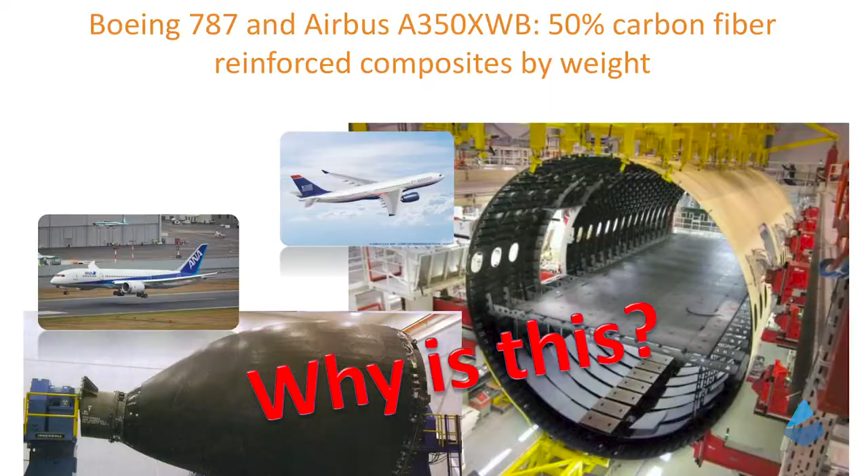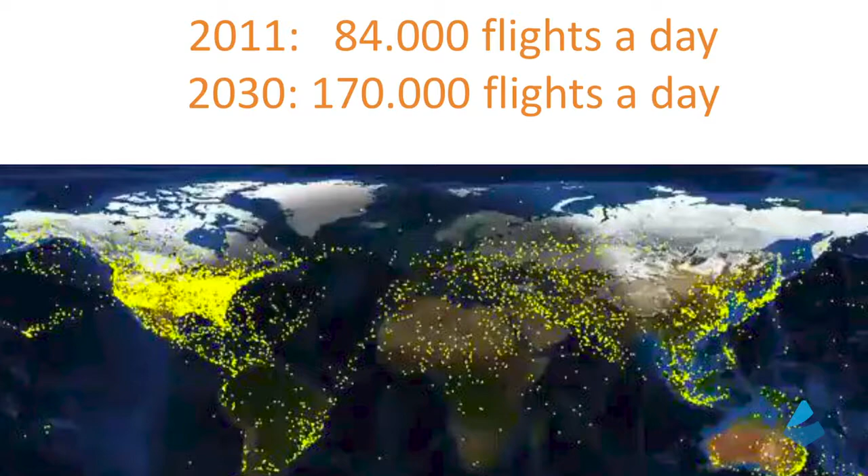And looking at composites, we see the 787, A350XWB, 50% composites by weight on the structure. The nose and the fuselage, the wings, the tails, they're all black these days. And why is this? Air traffic is increasing all the time. The projections today are still, in the next 20 years, travel will double, unless, of course, we are slowed down by the climate change situation.

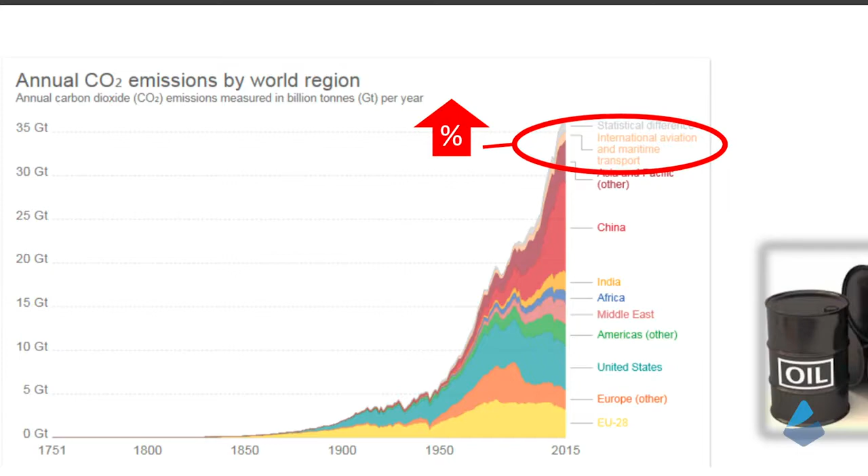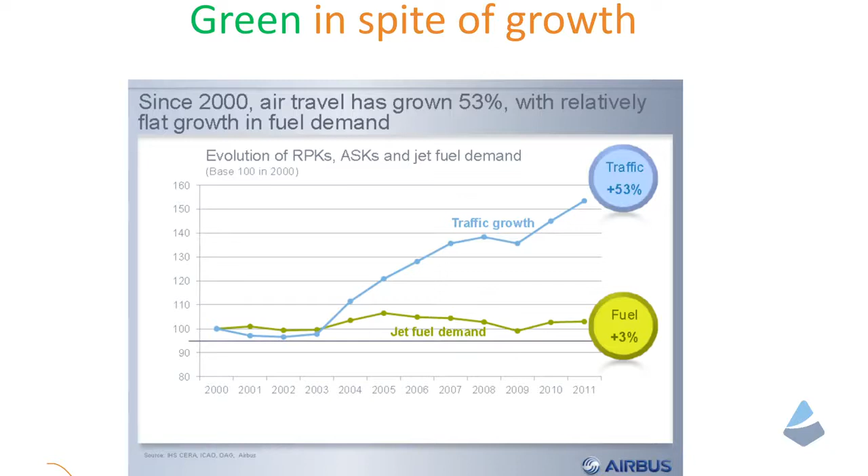This graph, it's a bit difficult to read, but at the top there is a contribution of aerospace, which is just a few percent to the CO2 emissions, but it is becoming bigger percentage-wise. And this is a graph of some years ago of Airbus showing that even though the amount of miles being flown by people is increasing all the time, the jet fuel demand, that's the green line, is more or less horizontal. It's constant. And there's a reason for this, and the reason is the engines. The engines are becoming ever more efficient and larger.

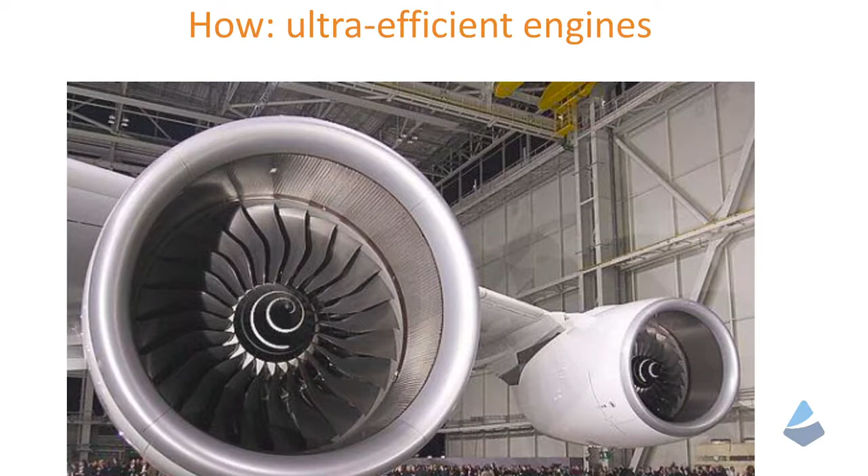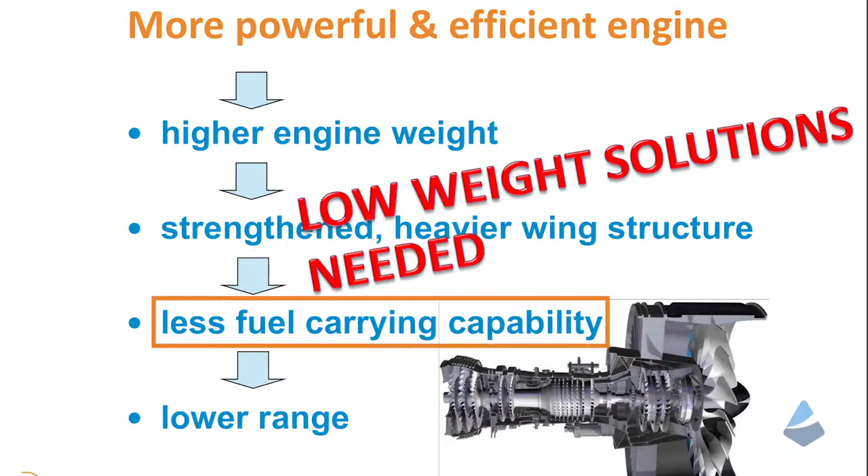And here's the engines for the Neo, for example. So very, very efficient engines. And what does this mean? If you have these efficient engines, the weight of the engine will tend to increase. Also, the wing will have to be reinforced to compensate for this. You'll be able to carry less fuel, and you'll reduce the range of your aircraft. So even though the engines are the big increase in performance, there is a drawback, and we need to compensate. And one of the ways to compensate is to reduce the weight of the rest of the aircraft.

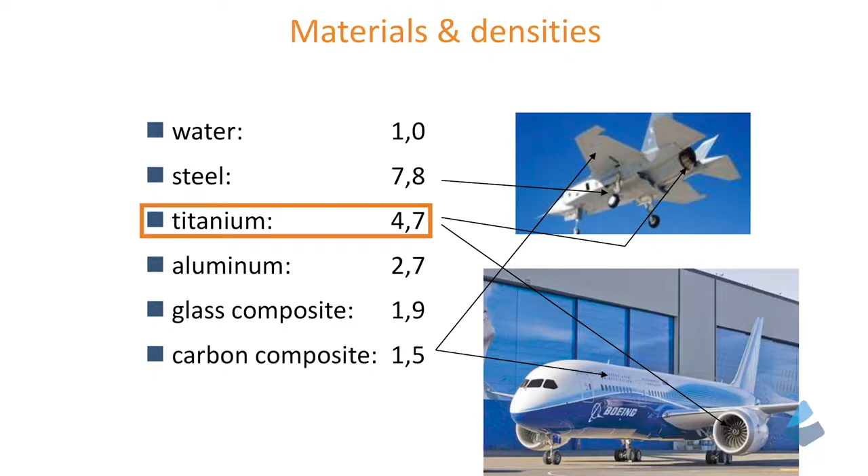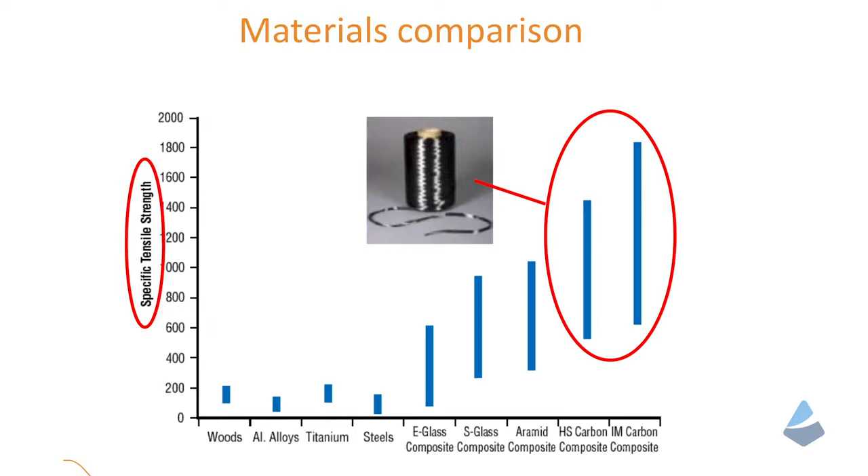So if we look at different materials, we have density comparison. Water for reference, number 1. Then steel, 7.8, heavy material used in landing gears. Titanium, 4.7, used in engines, but also in combination with carbon products on the newer aircraft. Then we have aluminum, 2.7. Glass composite 1.9, and then carbon composite 1.5. So it's a very low weight material. And then if we look at the strength divided by weight, the specific strength, we really see why the carbon fiber reinforced materials excel.

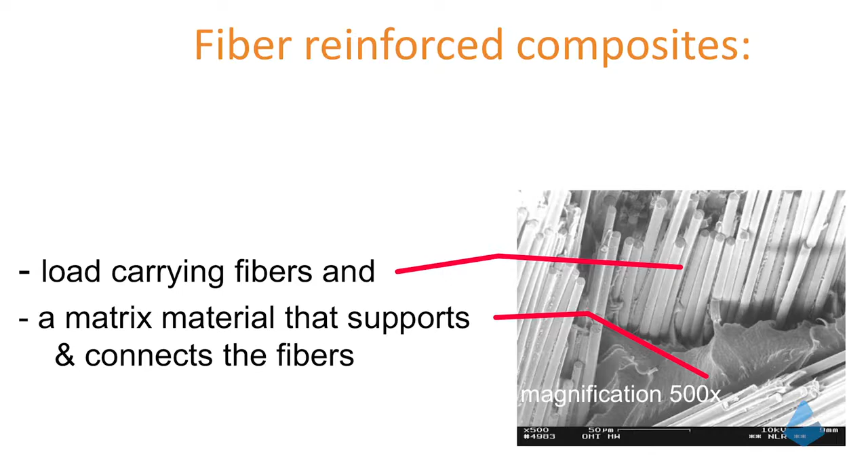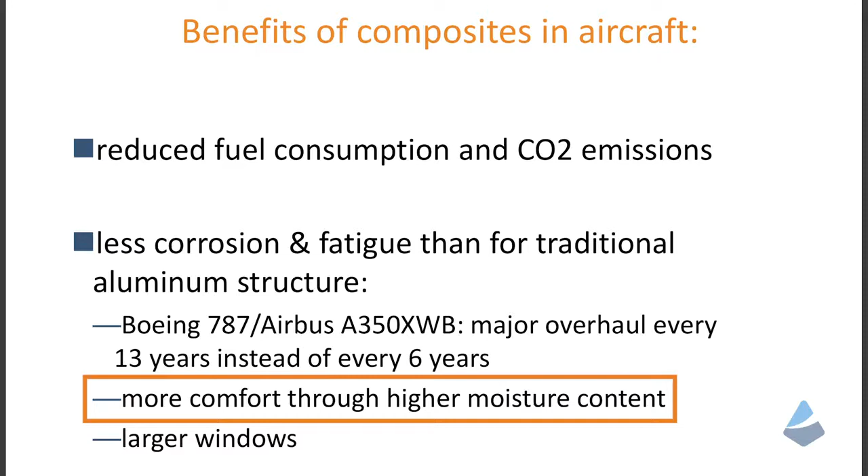Now most of you are probably aware of carbon being a good fiber. And we have the composites. Composites are a load carrying fiber and a matrix, a polymeric material holding the fibers together. And the benefits of composites: reduced fuel consumption and CO2 emissions, but also less corrosion and fatigue than traditional materials like aluminum. So the major overhaul is at a much larger interval, roughly double the interval than it was before. And there is more comfort in the fuselage. You have a higher pressure, a higher moisture content, so for the passengers it is a more positive experience, and larger windows as well.

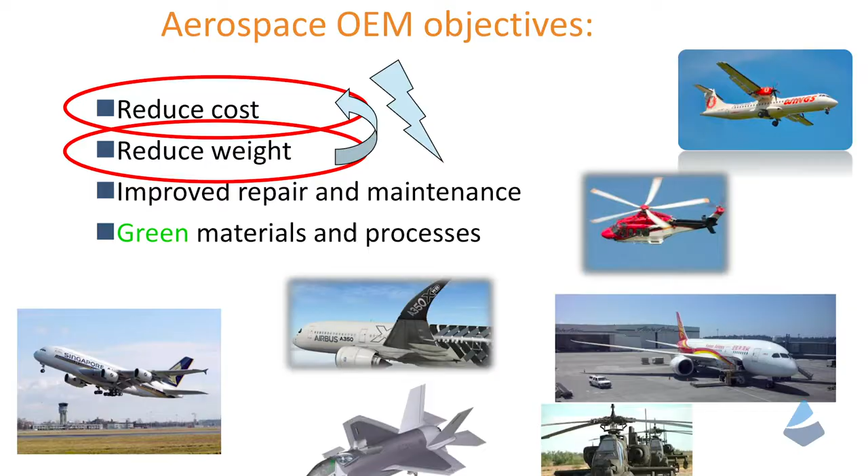So to summarize, the aerospace original equipment manufacturers have several targets. An important one these days is to reduce cost, to keep cost of flying feasible. At the same time, we do want to reduce weight. Everybody's talking about cost, but certainly if we want to reduce the CO2 emissions, we will have to reduce weight. And the problem often with composites is that these two requirements are conflicting. If you reduce cost, you increase weight. If you reduce weight, you increase cost. And the challenge is, can we find technologies, designs, where we can preferably reduce both?

We're going to heat this material and show it's safe. It doesn't really smoke and burn, but it'll get soft in the middle. And when it gets soft, I'm going to bend it, and basically simulate a production step that we do in our factory. It takes some time. There it is, it's getting soft. So, there, and then it cools down. And when it's more or less cold again, it's solid and stiff again. And this symbolizes the trailing edge of our rudder on a Gulfstream aircraft, which we make in a 7-foot length with a machine, but it's basically the same idea.

But what we do in the factory is this. It's a Toray product, a sheet of material like the material you have. It's several plies of prepreg. This is a single layer of thermoplastic prepreg, a carbon fabric with thermoplastic on both sides. Several layers, like 3 layers, are stacked and pressed together to make a nice laminate. So we're heating a straight line, 2 meters, like 7 feet in length, and then very quickly fold it over, and you're finished. So you need a folding machine with hot elements, and you have to push a little bit on the tip to make it nice and smooth.

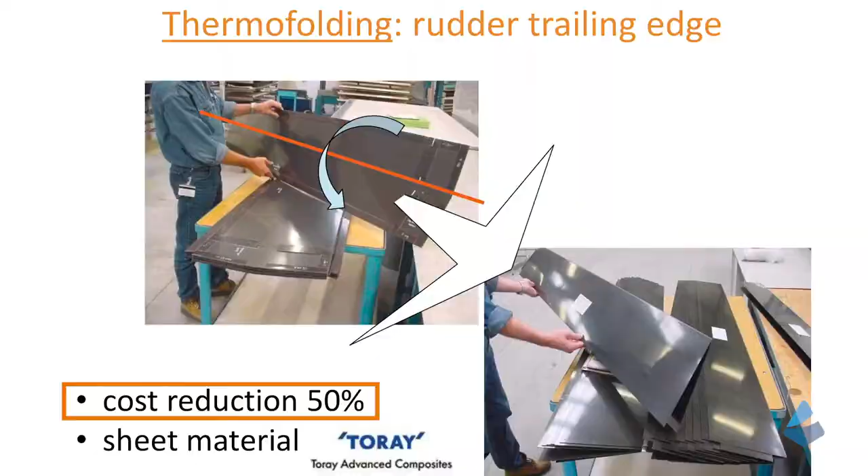And the cost is 50% of what we did before. Before, we bought prepreg, laminated on a tool, and autoclaved the product. Here you buy a sheet of material with added value and then very quickly make the shape. So it's about cost reduction. The quality of this folding is not so good. You can see in your little specimen, the fibers are all crumpled up. But for the trailing edge of a rudder, a secondary part, it can be acceptable. It's just an example of what you can do with thermoplastics.